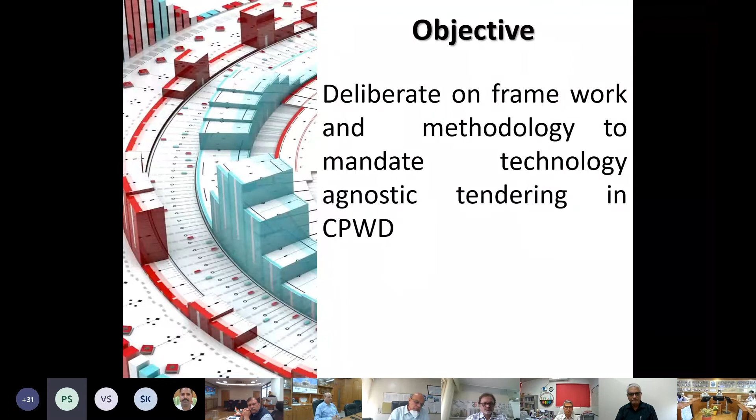Good morning, DG sir, SDG sir, ADGs, and friends. Today's workshop is on technology neutral EPC tenders in CPWD. Through this brief presentation, I will lay out the context for this workshop. The objective of the workshop is to deliberate on framework and methodology to mandate technology agnostic tendering in CPWD, through consultation on the CPWD proposal among stakeholders.

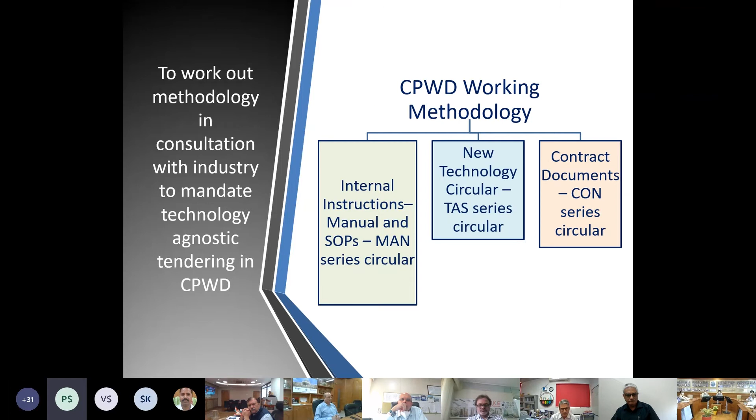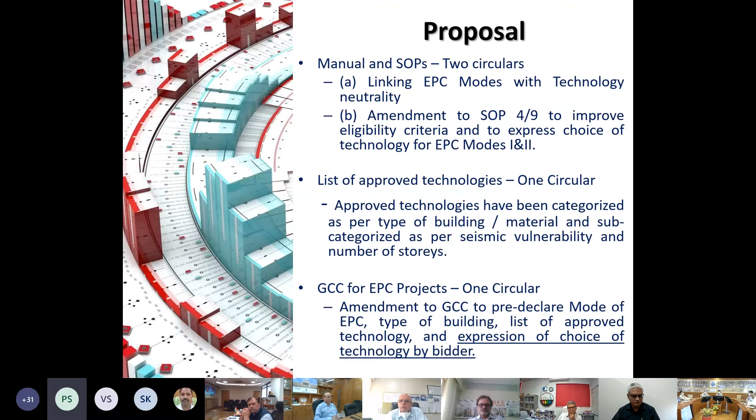The CPWD methodology for technology neutrality has been divided into 3 parts: manual and SOP circulars, technology circulars, and contract circulars. Under manual and SOP circulars, EPC modes have been linked with technology neutrality, and an amendment is proposed in the SOP to improve eligibility criteria and to express choice of technology for EPC modes 1 and 2. In the circular, technologies have been categorized, and in one circular, amendments are proposed for expression of choice of technology by the bidder.

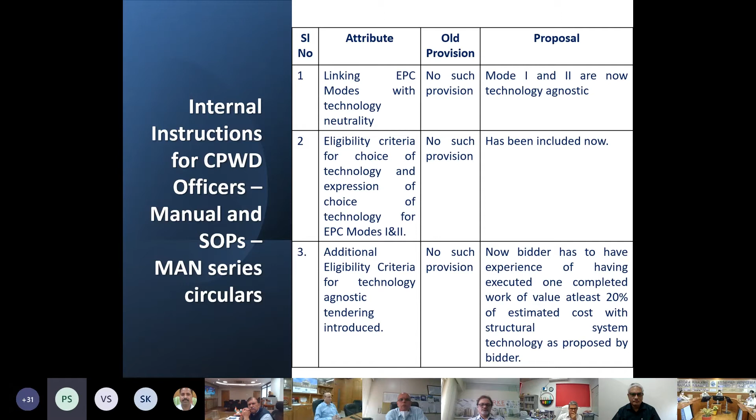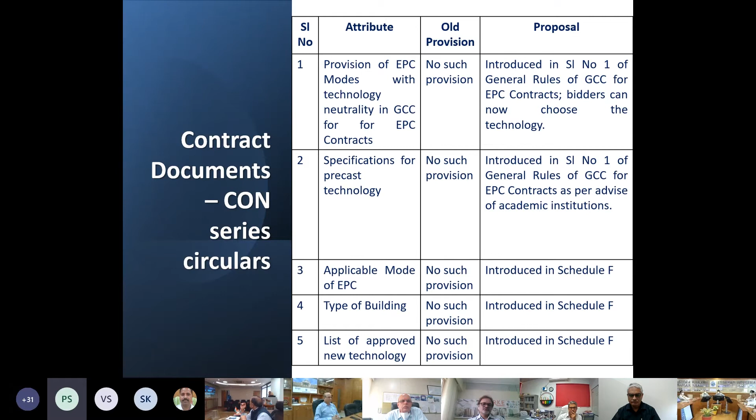Draft circulars have been circulated to the stakeholders through mail and website for deliberation and suggestions. Earlier, there was no linking between EPC modes and technology neutrality, which is now proposed. Technologies have been categorized. Amendments are proposed in the GCC and also in Schedule F of GCC.

Now I request Professor CVR Murthy of IIT Madras to kindly enlighten us. Over to Professor CVR Murthy.

Namaskar. Good morning to DG Saab and all the senior officers of CPWD, as well as the younger engineers and the invitees to this workshop. My responsibility is to present the current status, the understanding of the subject of technology neutral tenders, as well as provide clarity on what are the bare essentials required for us to be able to go forward with technology neutral tenders. I have a presentation which I will start now.

Can you see the screen? Yes, we are able to see. We are able to see.

Thank you. The subject on which I will dwell today is the seismic performance assessment of new technologies through full-scale testing. The presentation will be in three parts: earthquake performance assessment, new technologies, and the road ahead.

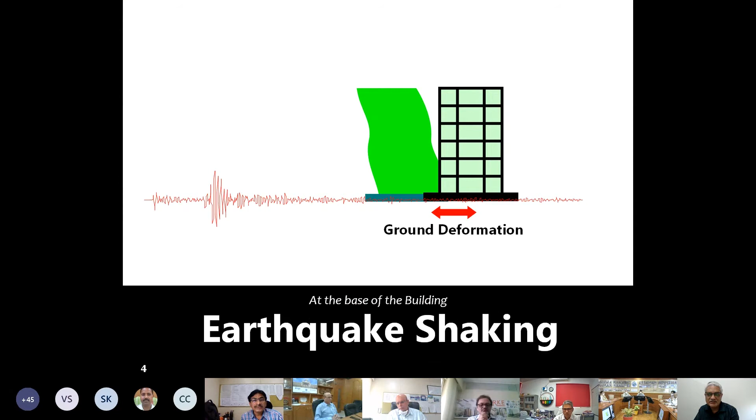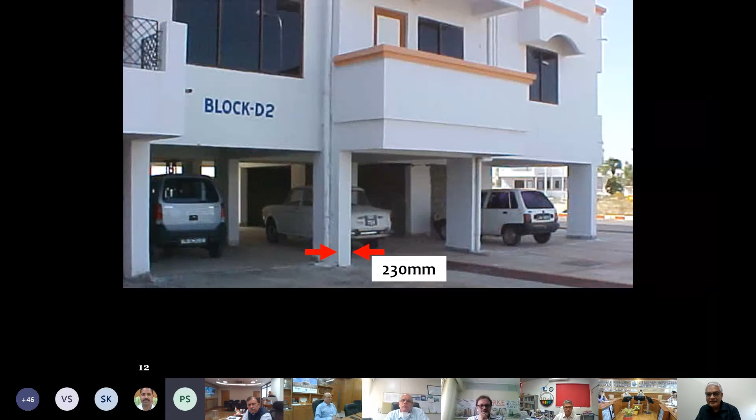Before I do those three elements, I want to present the context of where we are in the current built environment as far as earthquake shaking is concerned. If you flash back on time and look at the losses we have had, it clearly shows that we have been developing the built environment without a backbone of safety embedded in it. The rapid pace of construction in the conventional strategy tells us we have made a number of mistakes which we have to urgently correct. If not, we will be back in the same mode when the next earthquake happens.

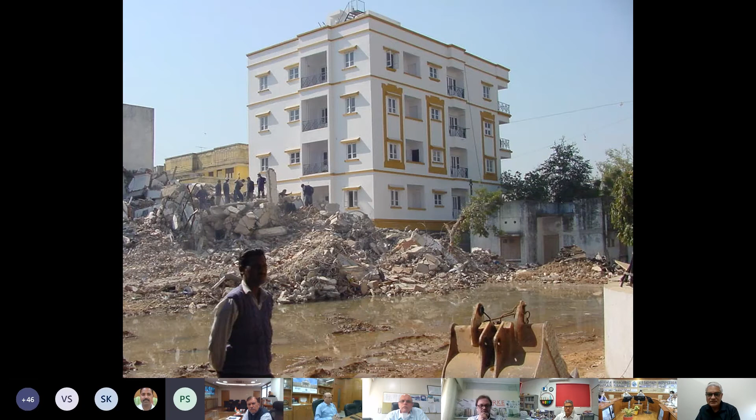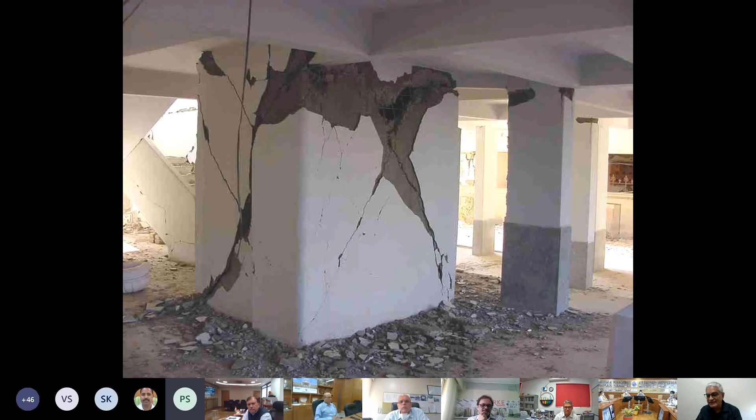You might wonder why I have been given this task of earthquake performance. The key point is that 80% of India's population is living in seismic zones 3, 4, and 5. This picture in front of us is a seismic zone 3 picture, not a seismic zone 5 picture. It is in Ahmedabad city, 225 kilometers away from the earthquake.

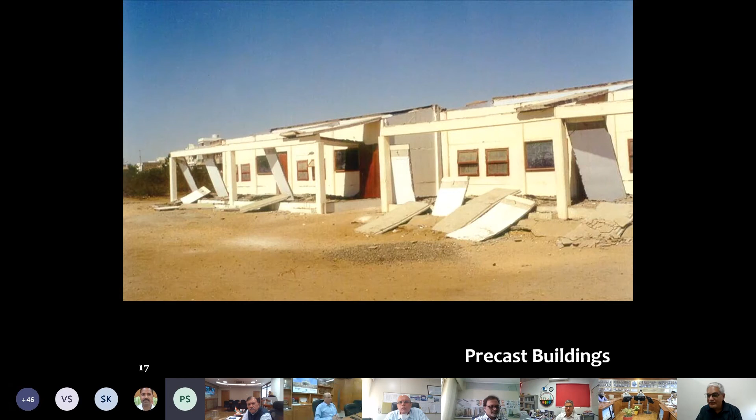We also had a good taste of the embarrassment of losing 3,500 school rooms built in precast construction in Gujarat. Out of the 6,000 that were built, 3,500 came down during the earthquake. We're very fortunate that children were not inside. In the same campus, you'll see on the left-hand side the new technology, on the right-hand side the traditional technology. The contrast is stark, and the answer is obvious: we are in a great hurry to do something, but we are not doing the full, detailed, rigorous work before accepting new technologies.

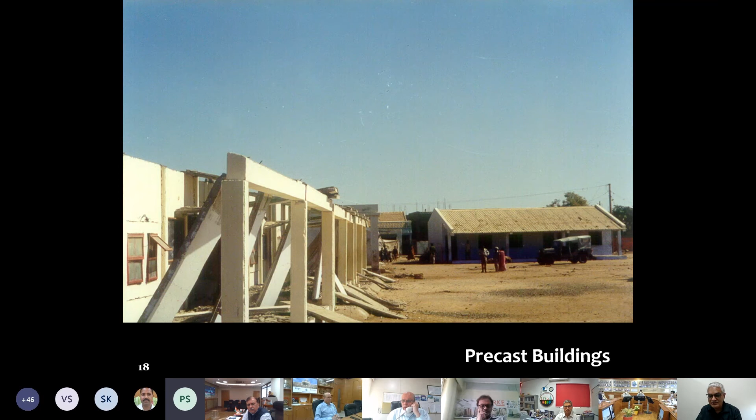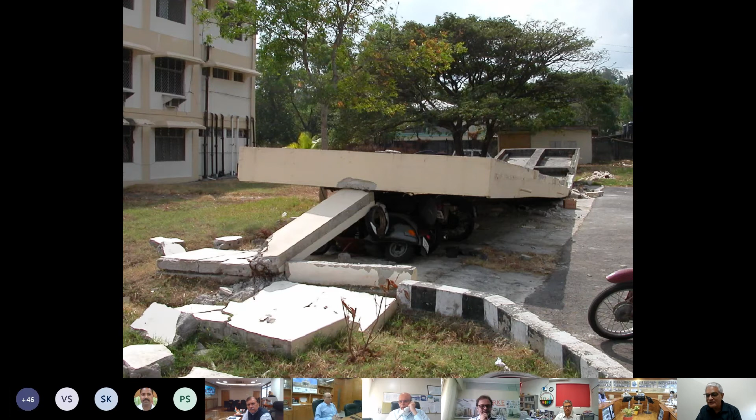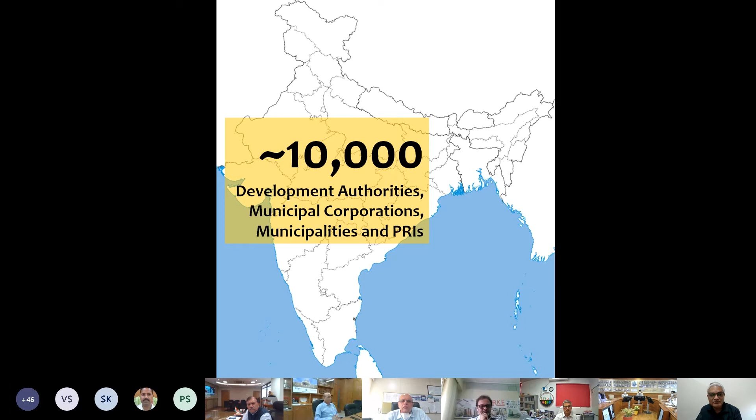There is no formal education of earthquake safety in the country in any college, so all of us are self-taught. As a consequence, the level of understanding of earthquake safety varies across the country, across the cadres. The summary is we have 10,000 municipal development authorities, municipal corporations, municipalities, and Panchayati Raj institutions in the country, and none of them examine safety.

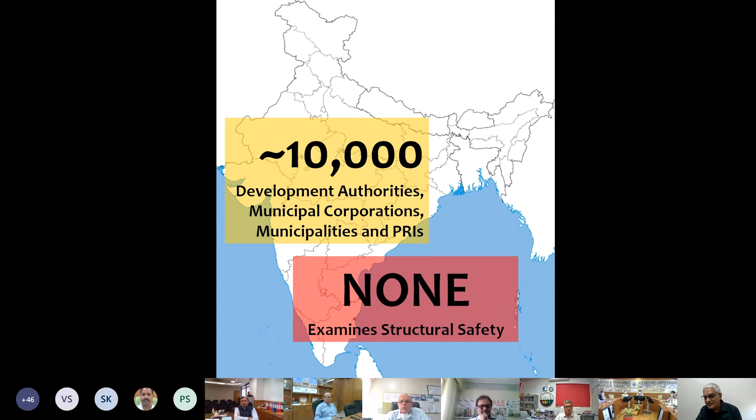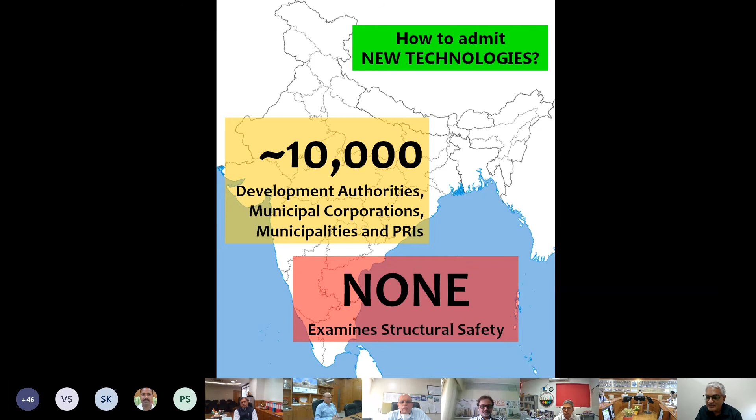In this backdrop, of those collapses and the fact that nobody is examining safety, the question is how do we admit new technologies? That is the question I'll use now as the basis for the rest of our discussion. First, let me clarify what earthquake performance assessment is, and then I will go forward arguing in favor of the actions we are proposing.

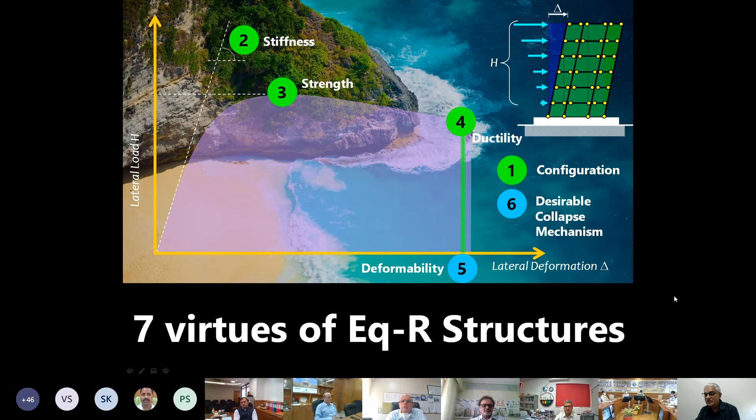First off, there are 7 virtues of earthquake resistant construction: configuration, at least a minimum lateral stiffness, sufficient lateral strength, good ductility, required deformability, desirable collapse mechanism, and the amount of energy absorbed by the structure.

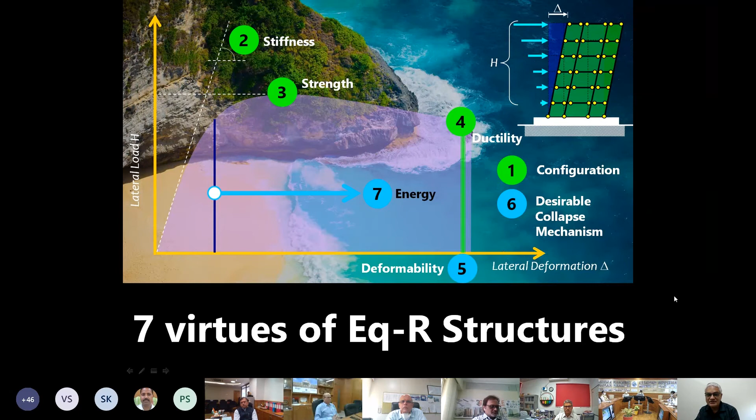If this is the classical understanding of the 7 virtues of earthquake resistant structures, the question is what are we doing? What will we see as a consequence if we miss out on any of them? If you miss out on the first, poor configuration, you'll get undesirable twisting and actions in the structure, leading to immediate collapse. If you miss out on stiffness, you will lose non-structural elements.

If you lose out on strength, there'll be damage to structural elements. If you lose out on ductility, individual members will rupture. If you overlook deformability, collapse of the structure will happen. If your collapse mechanism is not right, the type of collapse will become unacceptable and the level of deformation won't be sufficient. Finally, if you miss out on energy absorption, post-earthquake shaking duration will be very, very large.

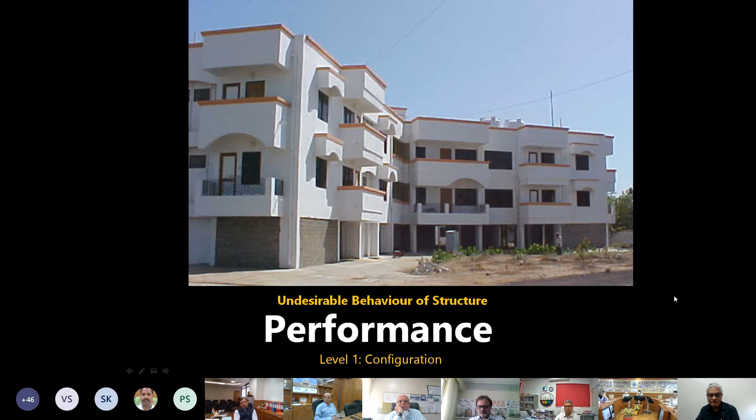Just to give you some images, here is an open ground story structure and an L-shaped building, which is going to perform very poorly, and it did on the campus of the IOCL in the Gandhidham area. Poor configuration led to undesirable behavior and loss of a lot of life on this IOCL campus.

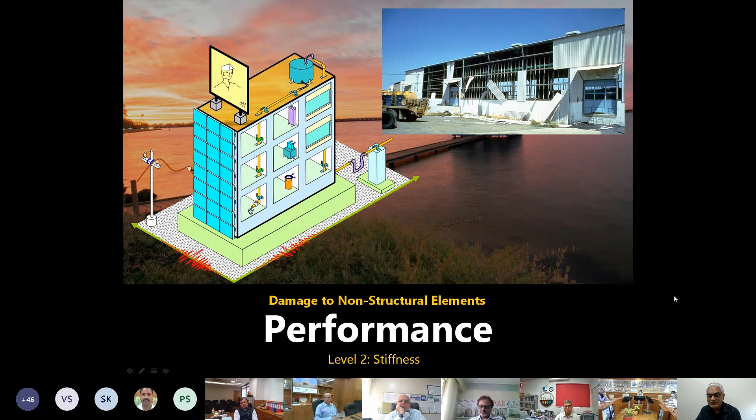The second one is the issue of damage to non-structural elements. 70 to 90% of our costs today are on non-structural elements. If we do not address the stiffness matter correctly, we will lose the non-structural elements immediately in small earthquakes as well as big earthquakes.

The third one is stiffness. If you do not have sufficient structural elements with adequate stiffness, the building will see a major collapse, especially when it has unusual behavior or unusual characteristics like the open ground story.

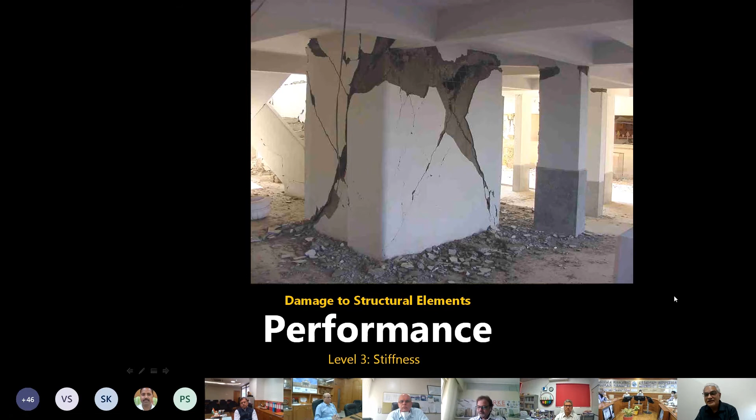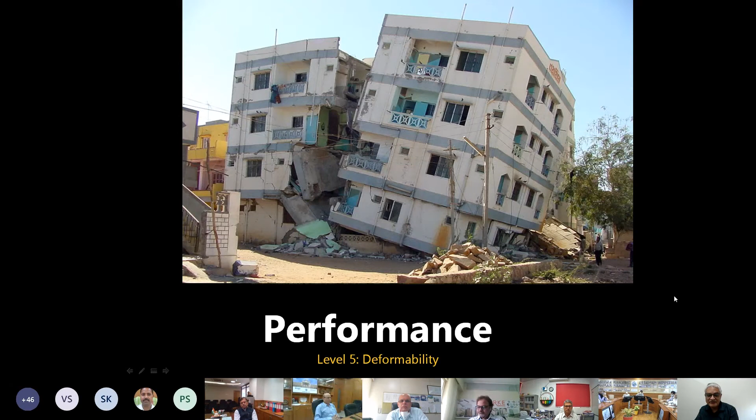The fourth one is rupture of structural elements, which will delimit the ductility of the structure, so we need to be watchful of that. The fifth is deformability, and a shortage of deformability in the structure will lead to collapse of the structure.

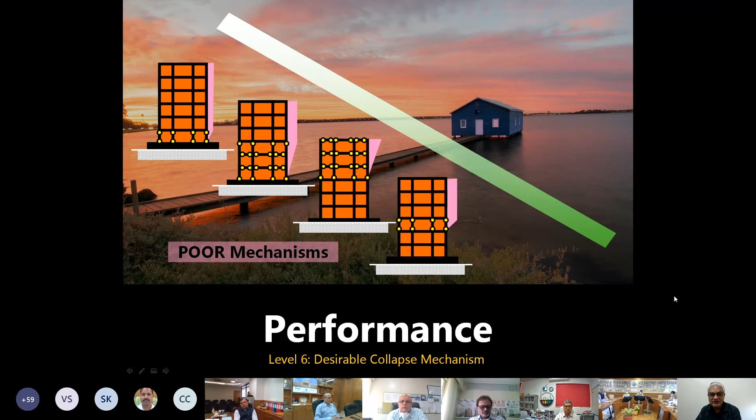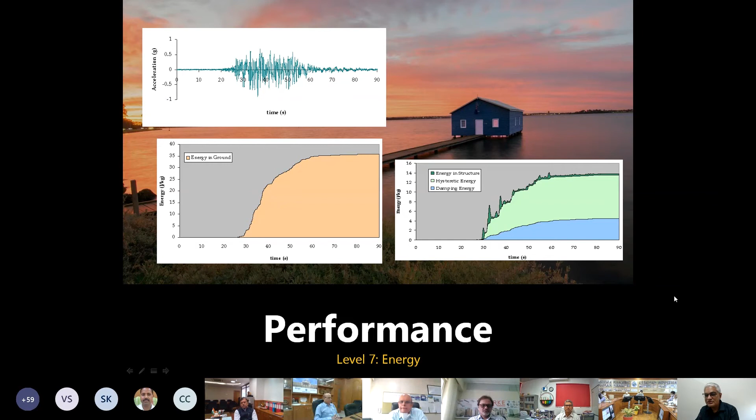Sixth, the collapse mechanism will not be the one we are looking for when we don't take care of the load paths and the detailing, design and detailing of the structure. Finally, the earthquake energy that is fed in has to be absorbed by the structure, otherwise the structure will continue to shake. And this is what I'm looking at.

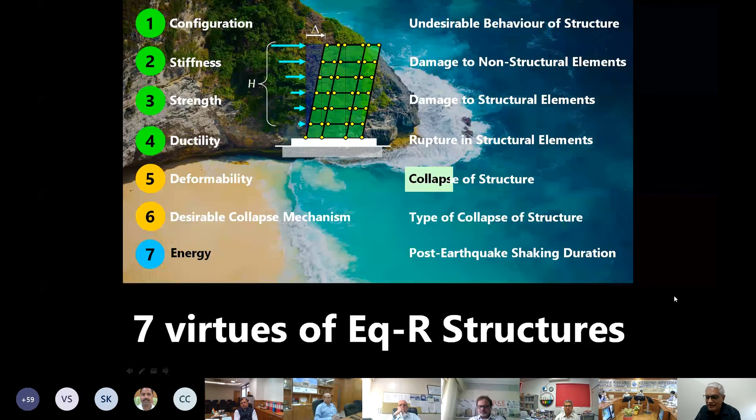If all of these are the focus items for us, I will use only one item in today's discussion, which is collapse of the structure, as a basis to argue in favor of the proposal of full-scale testing.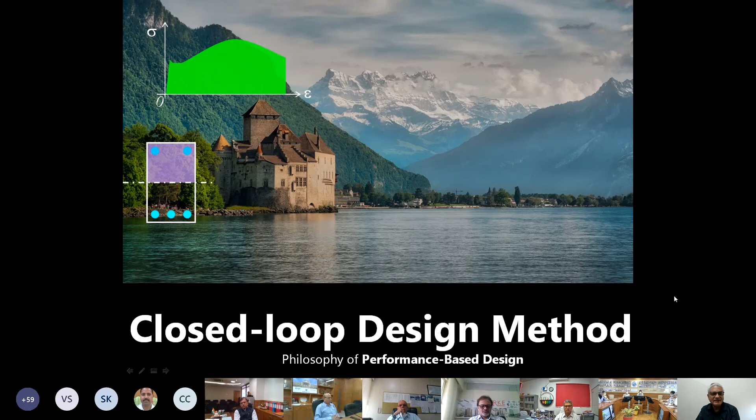We are clear that in the current context, we know our materials, we know how to design sections, and when we make members out of them we go ahead, detail, and construct it. But we don't know what the behavior of the structure is going to be. So we're doing the forward loop, but we're not doing the backward loop. And this is where our main responsibility lies.

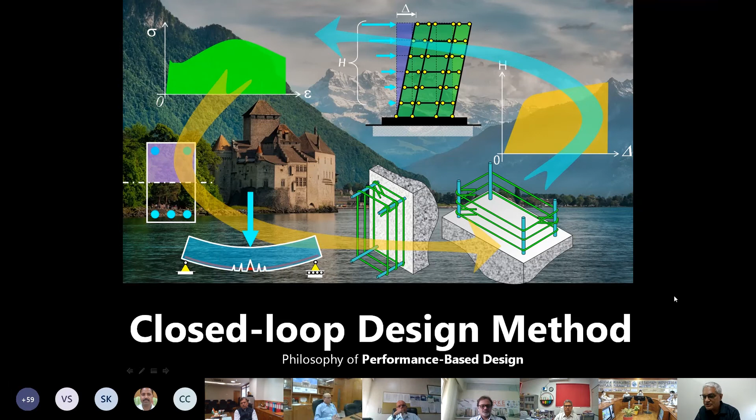Unless we are confident that the new technologies in the backward loop are giving acceptable behavior, we cannot admit new technologies just on the face value of the analytical work or design calculations. And I'll tell you why we don't trust analytical work and design calculations alone without testing.

Now, those of us who are into design will look at it that we have an elastic behavior. We divide by response reduction factor. We get the design strength. We design for that. We also have a serviceability level, and we look at the serviceability level deformations and we check the deformations accordingly. But when the earthquake comes, the force levels are not at this low level, but they are at minor, moderate, severe, and extreme levels of shaking.

As we started this morning, earthquake is shaking under the base of the structure and not a force applied on the structure. Force is induced by the mass owing to inertia effects. And so design levels are much smaller than the actual performance levels of shaking.

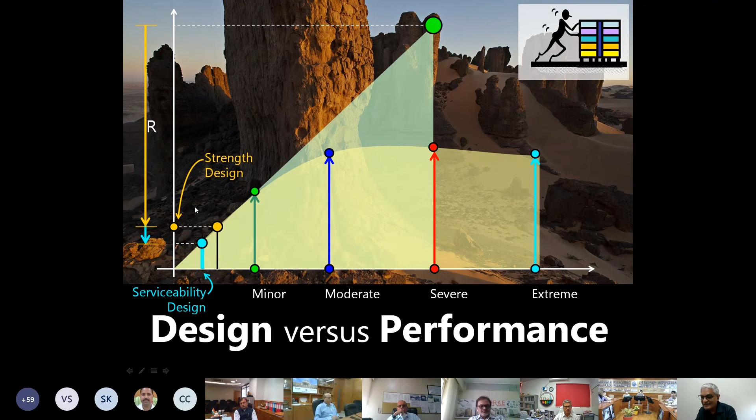This is the point I wanted to clarify, that do not say that we have designed for the force and so the structure is safe. It can't be, because earthquake is displacement and displacement is much higher on the horizontal axis, and the vertical axis is not in focus necessarily during earthquake shaking.

Just to tell you, if you look at the earthquake resistant design philosophy, it says there's a minor earthquake, we should have no damage. There's a moderate earthquake, some structural damage can happen, and in severe earthquake, no collapse should happen. The question is, we have another fourth level beyond the severe at which the structure will collapse. And we need to quantify how much is this margin between the severe and the extreme so that we are comfortable that the structure will be approved by us for construction, especially when you're looking at mass housing.

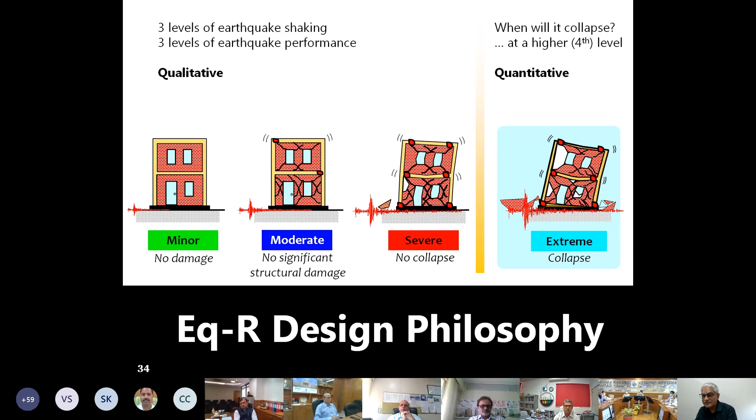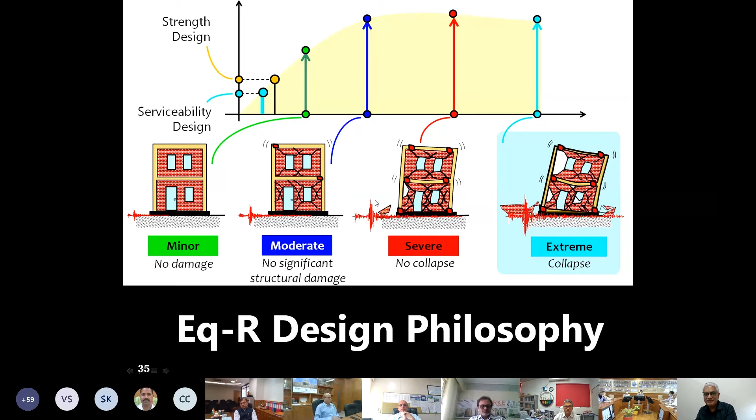In all of this, once again, you will notice that the minor shaking is much above the deformations that will happen under strength design or serviceability design calculations. And moderate is much more severe, and extreme are farther away. So there's one structure and it has to be checked for 4 shaking levels, and 4 performance expectations are there.

What are those 4 performance expectations? On the minor, we are saying we should have sufficient stiffness. On the moderate, we should have adequate strength. On the severe, we should have good ductility. And on the extreme, we should have sufficient deformability.

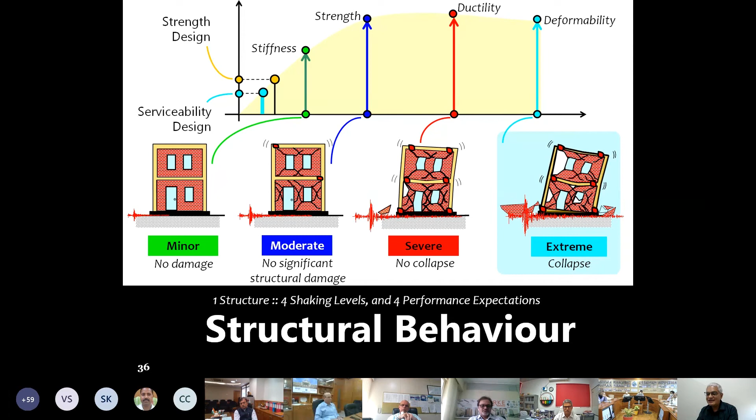This is where we will need to examine all our technologies on the horizontal axis, whether they can go forward or not. Now, many of us come up with nonlinear analyses. We have analytical tools now, do a pushover analysis, and then say that the structure has so much deformability and so on. You would agree that nonlinear analysis, depending on the assumptions made in the modeling and the inputs given as far as the member capacities are concerned, will decide what will be the overall capacity.

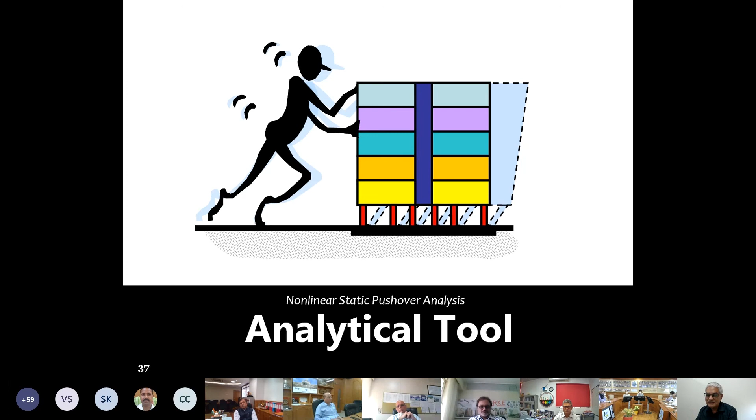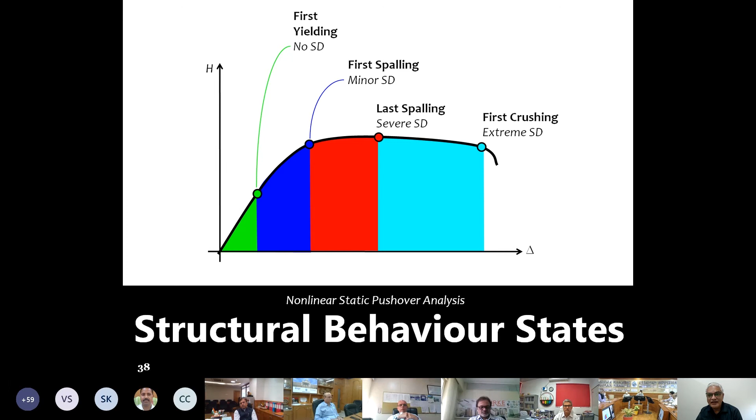Also, the current nonlinear analytical tools are only for monolithic in-situ constructions and not for some of the newer technologies like precast constructions and pre-engineered constructions that we have. So we are looking for, in the structural behavior, various nonlinear states like the yielding, spalling, and then crushing of the concrete. Now you might wonder, why am I talking about all this?

If you're looking at a critical building, you will want it to behave elastically during an earthquake. If you are looking at an important building like a hospital, you might at best allow some nominal structural damage in that, but not that which will cause the function to be disrupted in the aftermath of an earthquake. But in all cases, we are looking at no collapse as far as normal buildings are concerned.

So if you're looking at high-end constructions for special structures, you're looking at elastic behavior. If you're looking at hospital-like lifeline structures, you're looking at nominal structural damage. And if you're looking at common man houses, you're saying no collapse at all. This is what we have to guarantee when we approve a new technology.

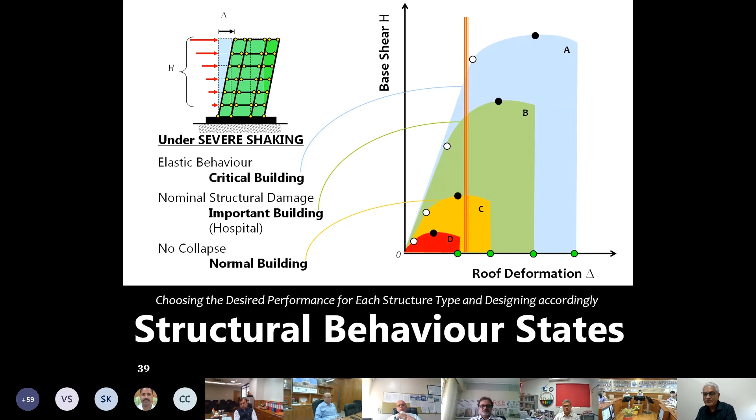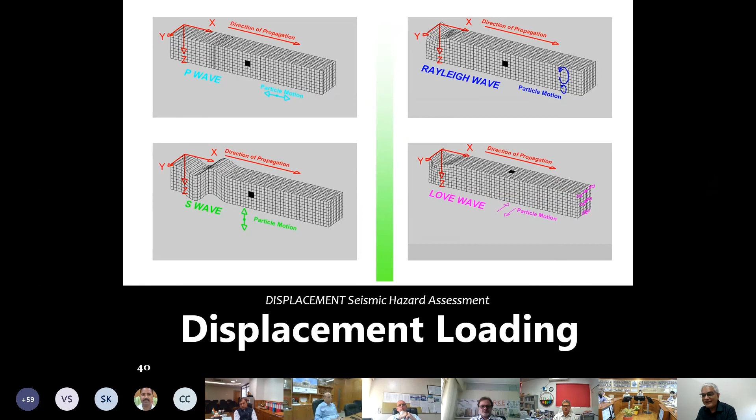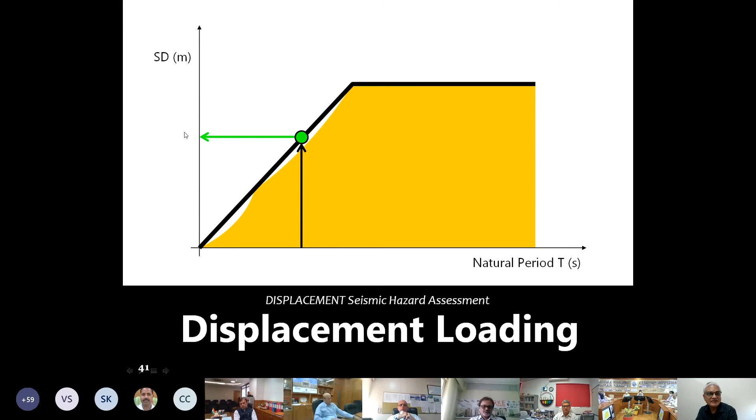What do we mean by these levels of shaking? Earthquake movement causes deformation at the base of the earth or the base of the building, leading to wave actions at the base. Depending on the natural period of the structure, the bottom is subjected to a relative displacement with respect to the top of the structure by an amount SD. That displacement is what you have to guarantee in the structure.

All it means is the normal understanding that strength implies safety is not true in the case of earthquakes. In earthquakes, you have to talk about deformability of the structure, the horizontal axis capacity.

For example, these green dots are the horizontal deformation capacities of each of these buildings A, B, C, D. If the earthquake demands more than the green dot, that building will collapse. Depending on the level of earthquake shaking, the white dots are the linear range quantities and the black dots are the maximum load capacity limits.

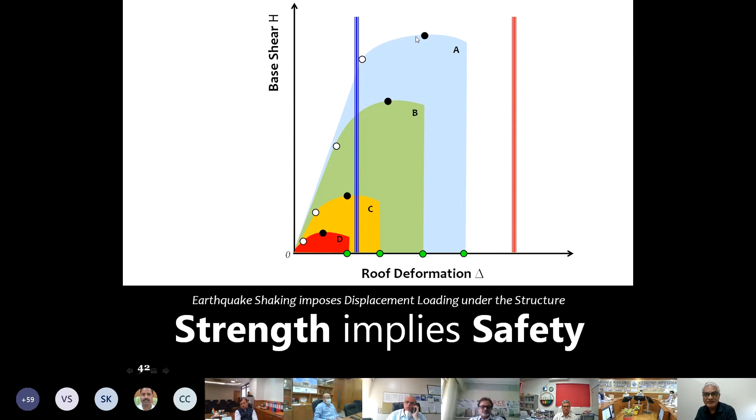So let us be clear that strength does not imply safety in the case of earthquake resistance, right?

Based on past earthquakes, we have noted that a number of technologies have shown very poor performance during various events worldwide, not just in India. Unreinforced masonry, of course, all of us agree on that. Open ground story buildings - our eyes were opened in the 1997 Jabalpur earthquake. We did not draw attention, but 2001 clarified it adequately.

Flat slab buildings - a number of buildings worldwide are having great distress. We will soon see a large number of collapses if we continue to use flat slabs the way we are doing right now with pre-stressed slabs. Precast buildings and structures and pre-engineered buildings - the last three are not having Indian standards for it.

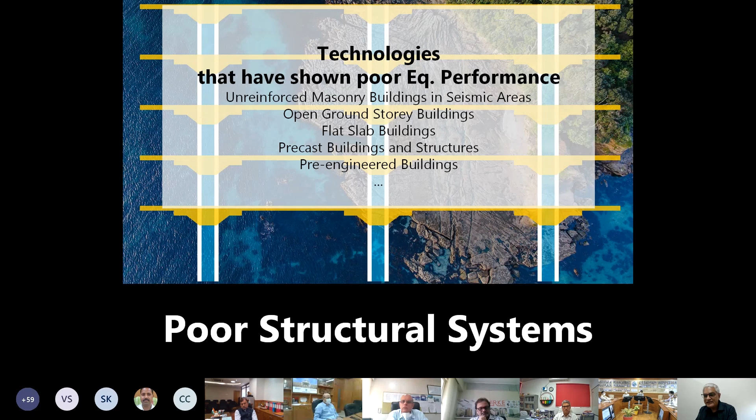I would like to underline the importance of the need for Indian standards. If you understand the procedure of development of standards, there is a whole sequence from concept to analytical work, to experimental work, and then detailed system level tests before technologies are admitted. If we haven't followed that path, then we have to say we are not ready to admit a technology.

So the urgent step that we have to take is to prohibit the use of untested technologies, especially precast, pre-engineered, and pre-stressed flat slab buildings.

Now you might say this is not acceptable to us. I agree with you. My task is to tell you the truth and also tell you the way out of this truth. So what we are talking about is we need to test these technologies before we go forward.

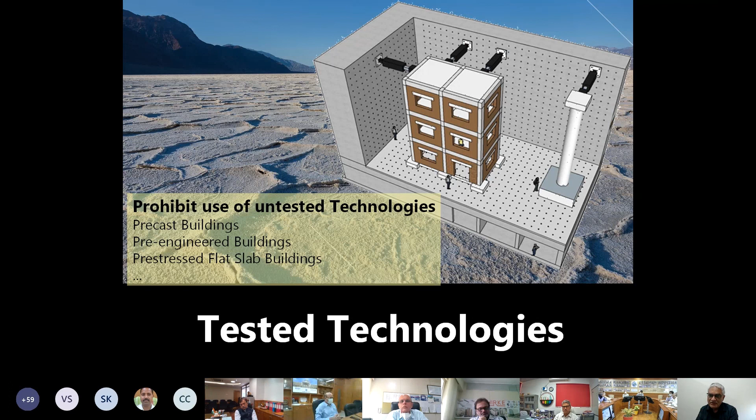Now on the picture you see here, a 3-story building which is subjected to lateral actions at the top level. This is the testing that we are looking for in buildings, and you can do that for bridges and other structures also.

You might ask, why are we talking about a 3-story structure for any technology to be tested? It's very simple. The bottom story is held at the base, so this is not the normal structure we're talking about. At the top story, we have to apply a load, so we are doing some fixtures and all that - that is also not the normal condition.

When an earthquake happens, it will happen by itself, so nobody is pushing at the top. These localized forces will cause some amount of disruption of load paths and so on. The only story that is untouched by either the bottom support or the top loading point is the middle story. This is the reason internationally 3-story structures are tested to examine the adequacy of the design and thereby clarify that this design can be taken forward into a technology.

So full-scale testing becomes essential for us. The reason is that in scale model testing, earthquake shaking leads to nonlinear actions. In a scale model, when you bring down the size of a column from 400 mm to 100 mm, the bar diameters have to be scaled down as well. That is possibly only possible if you can negotiate with a steel company to give you...